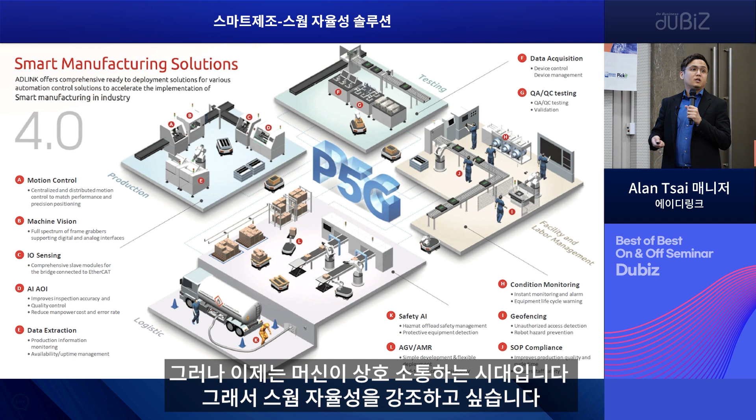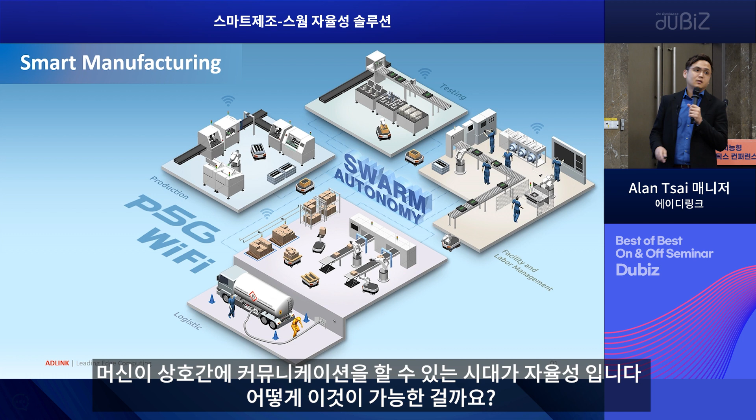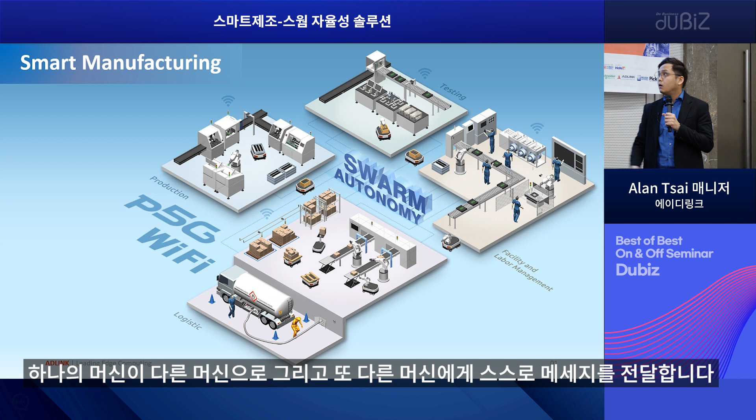But nowadays, try to imagine that the machine can talk to each other. We call this SWARM autonomy — our concept to make the machines talk to each other. How can they do that? In the factory, no matter old or new, the AMR is a physical machine that can go through the factory everywhere. If the message can be carried by the machines themselves, I can bring the message from one machine to another, or maybe a third machine. So here I will say we try to make our factory go from automatic to autonomy.

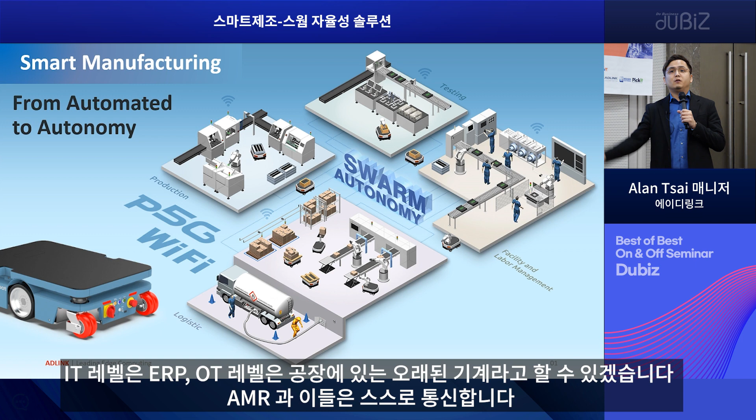The AMR is the physical thing we provide, and the AMR can communicate with the machine, or at the OT level or IT level. IT level is like ERP, OT level is like all the machines in the factory — they can communicate by themselves. This reduces labor and also optimizes production efficiency.

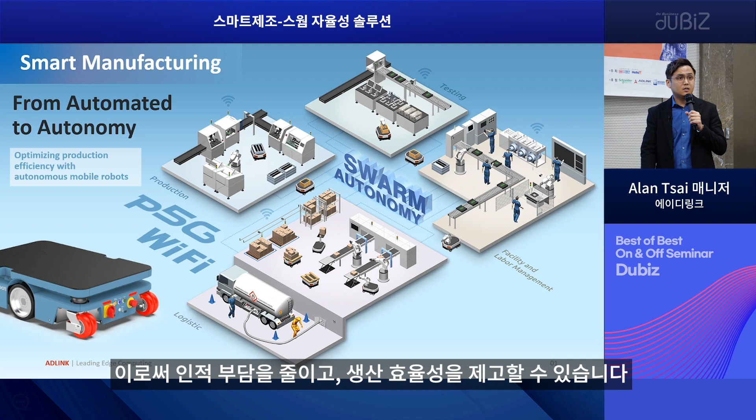With the autonomous mobile robots — this is a very simple concept about autonomy. Next I'll talk about the challenge: if a factory wants to transfer from automated to autonomy, what kind of challenges will they face?

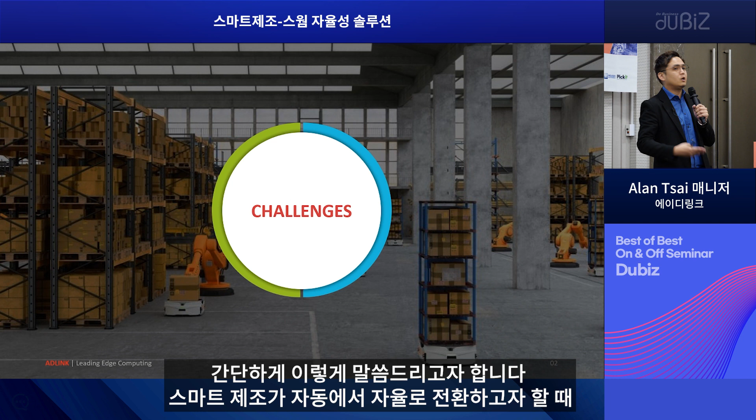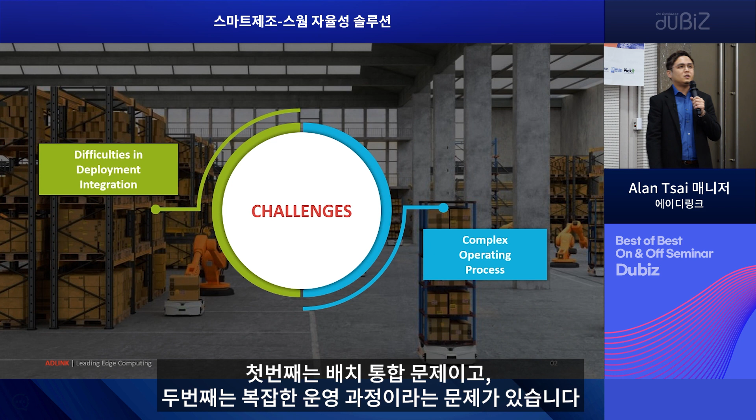Put simply, there are two challenges we sum up: the first is the difficulty in deployment integration, and the other is the complicated operation process. In the factory, whether new or old legacy, there are lots of machines, and they come from multiple brands, each with their own systems. SWARM autonomy needs to combine with the OT level and IT level, so you can imagine — lots of different brands, different systems — it's really hard to integrate or combine with every system.

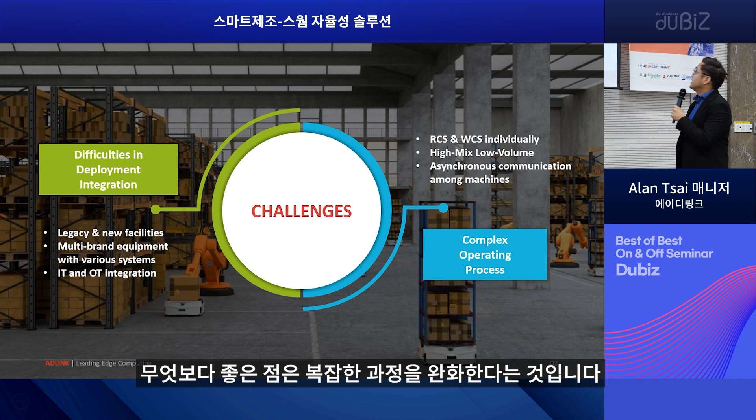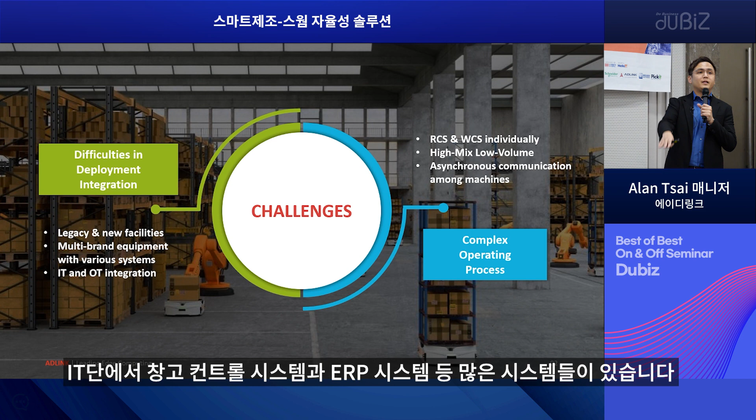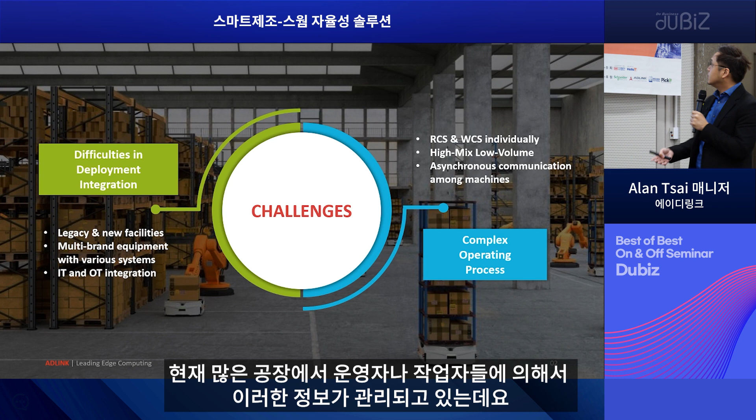Based on this, the operating process is complicated. The old systems — we have lots of AMR brands, and each brand has its own robot control systems. At the IT level, maybe we have warehouse control systems, ERP, lots of systems. Nowadays, lots of factories are all controlled by operators or workers, so the machine information or data synchronization and communication go through this. These two things are the challenges we hear from factory owners trying to transfer their type from automated to autonomous.

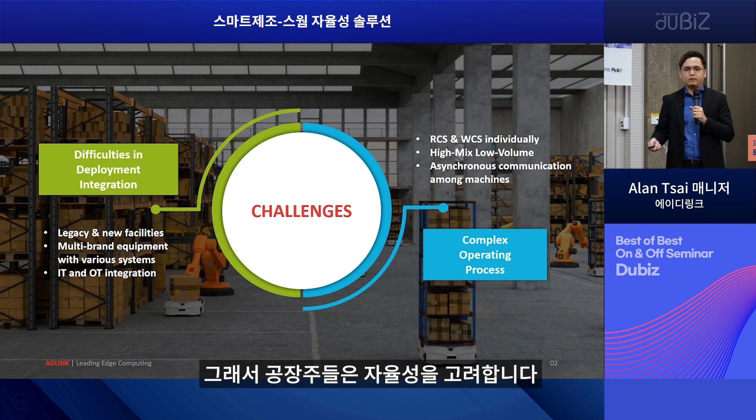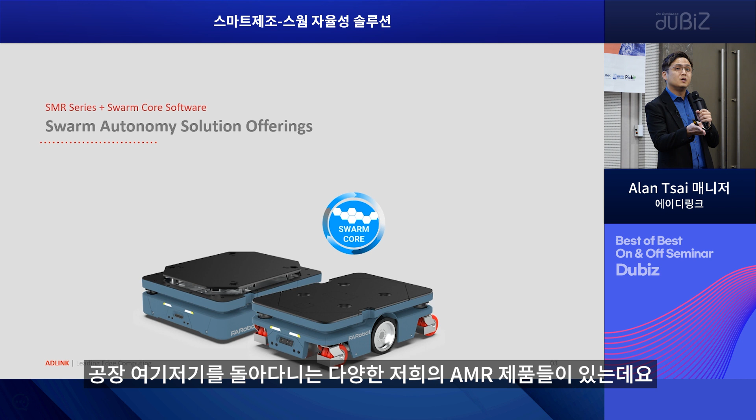So our offering: we offer two kinds of products here. One is the AMR I mentioned, the physical thing that goes to the factory everywhere — we provide the AMR and call it SMR. The S means Swarm, so we named our AMR the SMR. The other is Swarm Core. For the AMR, we provide two kinds of payload: 1000 kilograms and 250 kilograms.

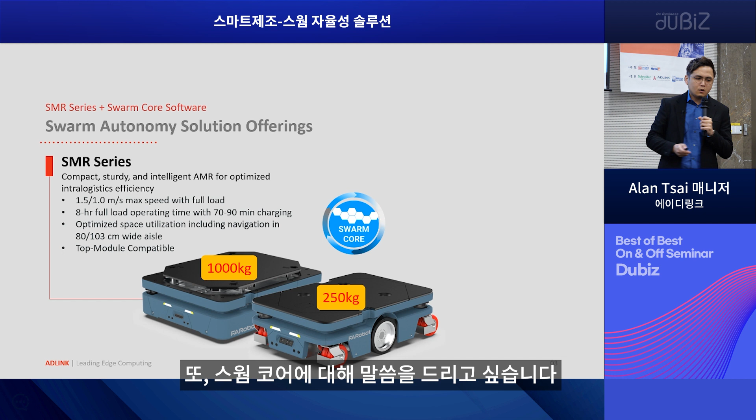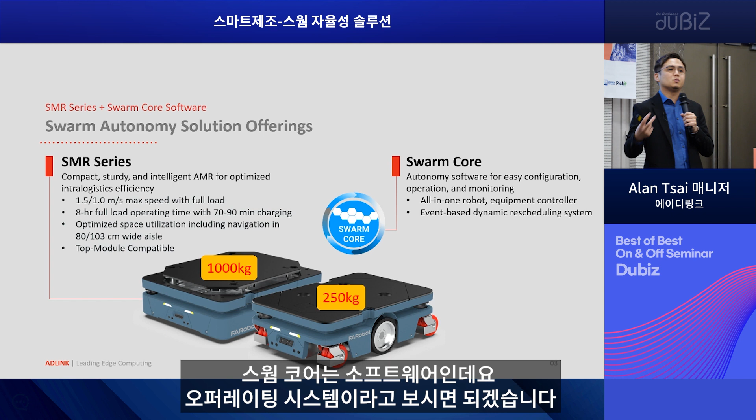It depends on the different scenario — you may have a robot conveyor, or a big rack or small one, so different payloads let you use different SMR models. The other product is Swarm Core, which is just software — you can imagine it like an operating system. We put Swarm Core into the server, like an edge controller, PC, computer, or server — basically any computer. Swarm Core tries to make it easier for the user to configure the machine, operate, and monitor it. Swarm Core has two kinds of features here.

One is going to combine the old machine, another is our dispatching systems. Next I will go through two features about these two products, and I'll try to use the features to give more detail about the autonomy, what we can do.

The AMR has different functions. Maybe one function combines with a conveyor, maybe combined with a robot. So the AMR will take a robot to pick up or drop off things. That's the OT side, normally separated into this product line.

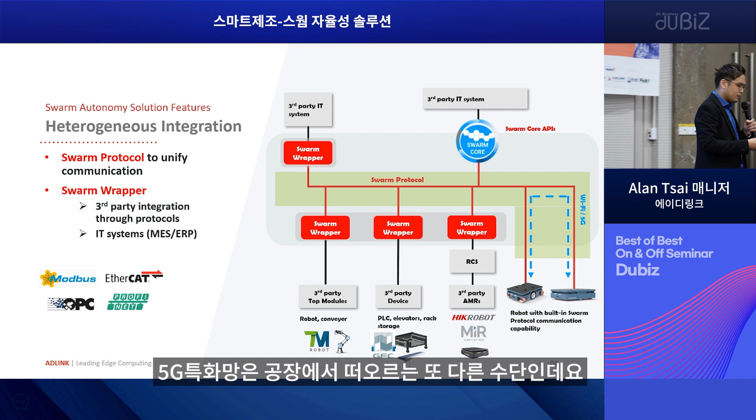By the way, as you know, in the factory we try to make the data connect together, so maybe we use Wi-Fi internet to make each machine connect. Our AMR also provides private 5G - private 5G is another trend for the factory. Our company is going to provide private 5G servers, so our AMR will definitely support the private 5G protocol. So this is one of the Swarm Core features.

Another one, as I just mentioned, our Swarm Core has the dispatching system, which means fleet management. For the dispatch system, we use event-based control. Event-based means the ERP will send mission one, and mission one means maybe the AMR will go from machine A to machine B, or machine B to machine C. So each machine is defined as event-based. We use this kind of event-based control management, and we have our dynamic reschedule capability.

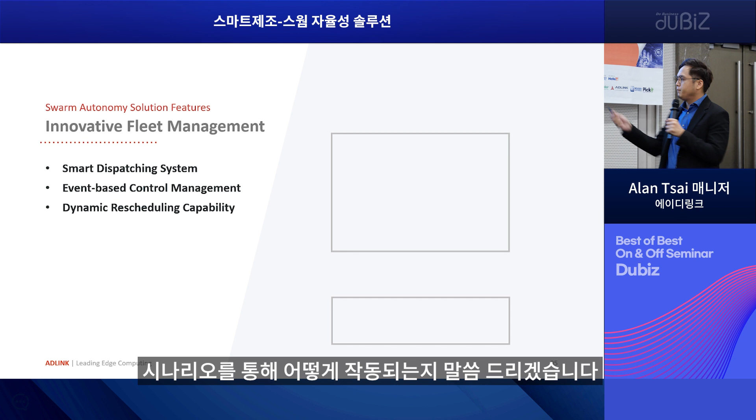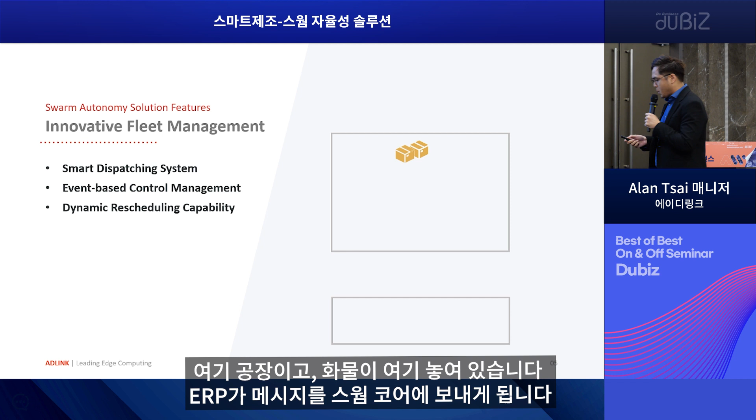So I will give you scenarios on the right-hand side to put it simply how it works. Okay. So the first one here, we can see there's a factory and there's a cargo here. The ERP will send a message to our Swarm Core, and Swarm Core will ask one of the AMRs to pick it up. Okay, so that's very easy.

Another scenario is that there's another cargo here. So actually, it's the same. Our Swarm Core will get the mission from the ERP, and another AMR comes. But if something happened on the road here, maybe some obstacle, it stops the AMR on the way to the cargo.

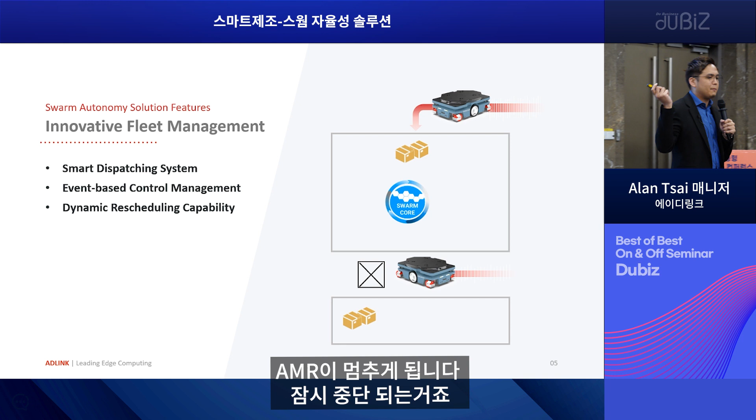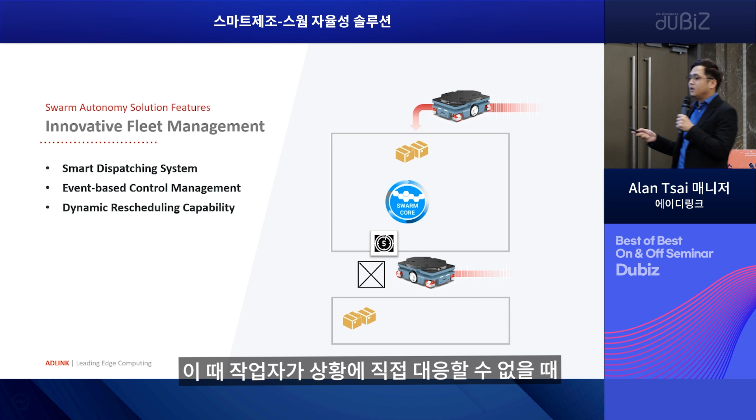We have the timeout. You can set the timeout to 5 seconds, 10 minutes, 30 minutes. So it's counting down, and if the operator cannot handle this kind of situation, the AMR will go another way. We call it our backup route. This AMR will go another way to pick up the cargo to finish the mission. So we call it dynamic reschedule capability.

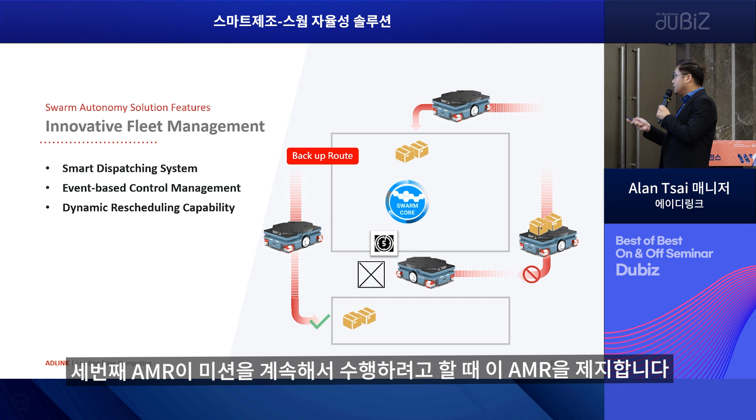Okay. So the third scenario is here. If the situation stays here and a third AMR comes and wants to go this way, our Swarm Core will talk to the third one and say, oh no, we cannot go this way. So it will pick another way. We call this traffic control. So these three scenarios describe our dispatching system.

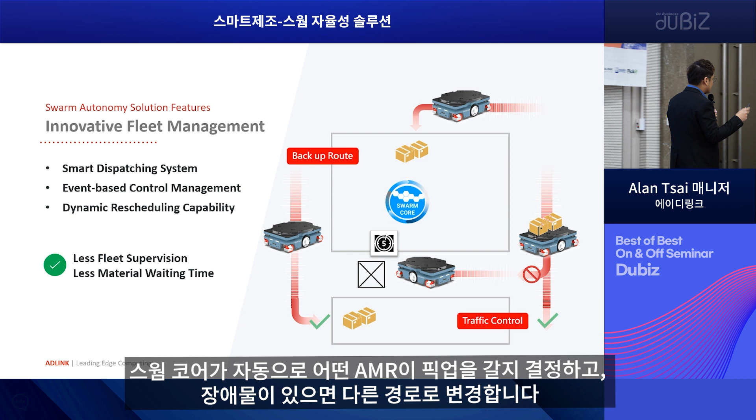We try to make sure the material has no need to wait. Our Swarm Core will automatically decide which AMR goes to pick up and which AMR goes another way to avoid this kind of thing. And as I said, Swarm Core has this kind of supervisor, so we try to let the operator have less fleet supervision. All of this runs automatically in our Swarm Core.

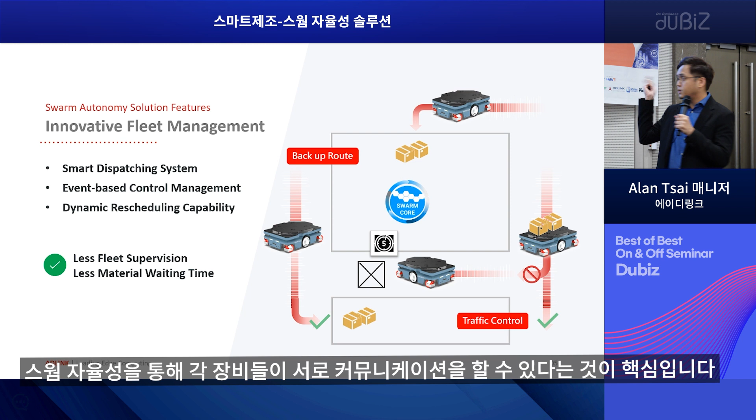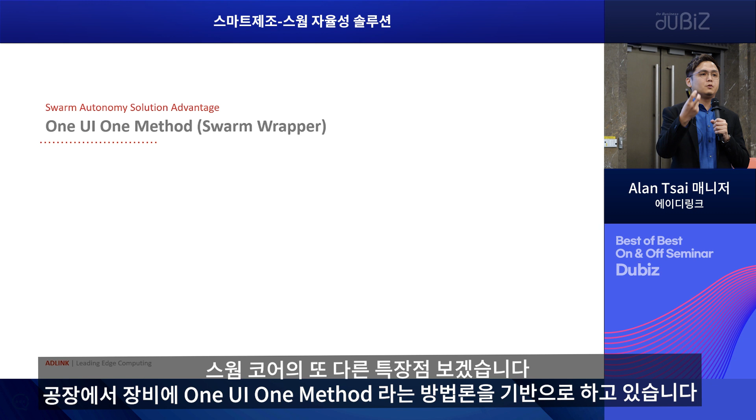So these are two features of Swarm Core, and I think they are very simple to understand. Imagine everything goes to the Swarm autonomy, so every piece of equipment can talk to each other this way. Now I will say another advantage of our Swarm Core, because in the factory, we try to make the device or the UI simple. It's quite good, right? So what does our UI provide?

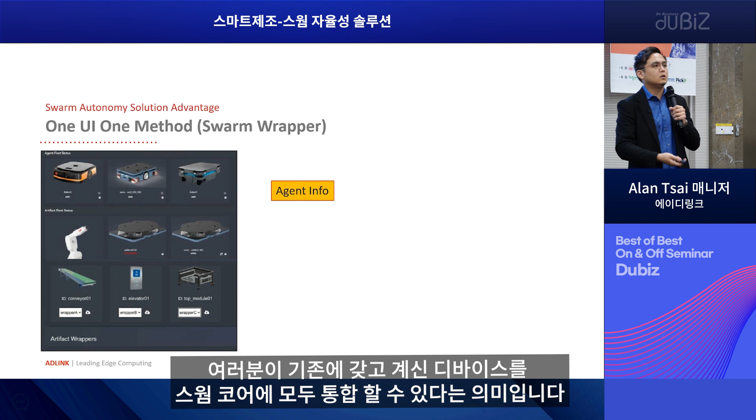The first thing is that our UI provides the agent info. You can see the middle one is our AMR. This is a real case in Taiwan. We integrated a third-party AMR here and another third-party AMR here. So from this UI, you can manage all the devices you have already integrated into Swarm Core. At the top here, we can see there's a conveyor, elevator, top modules.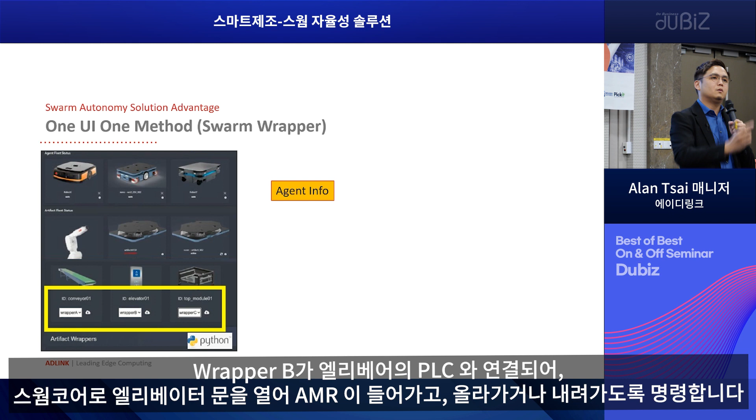These are third-party devices. It's not a robot, it's not a car, right? So for this kind of third party, we use the Swarm wrapper. You can see we have wrapper A, combined with the conveyor, and wrapper B, which is connected with the PLC in the elevator. So Swarm Core can control the PLC, ask the elevator to open the door, the AMR goes through, and then goes down or up. Also the top module as well. So this is agent info.

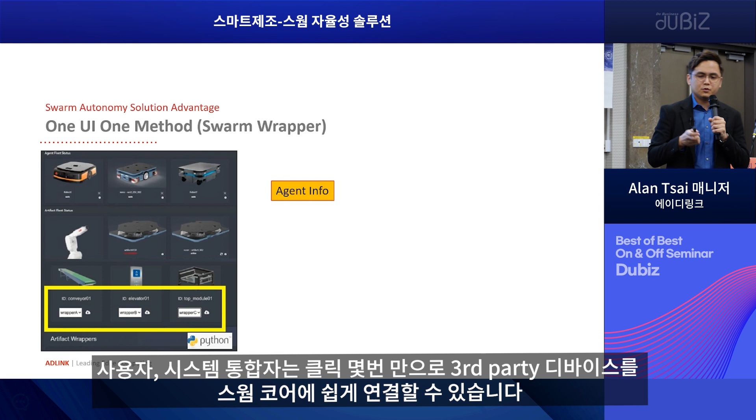Right now our wrappers use Python to modify, but in the next generation we will provide a UI. Only UI, so the user or system integrator just uses a click, making it easier to connect the supplier device into Swarm Core. Okay. So the next one is real-time monitoring.

In this Swarm Core, the UI also provides a real-time monitor to check how the situation is, how things are in the factory, so we can see where each AMR is and what happened. So it's real-time monitoring.

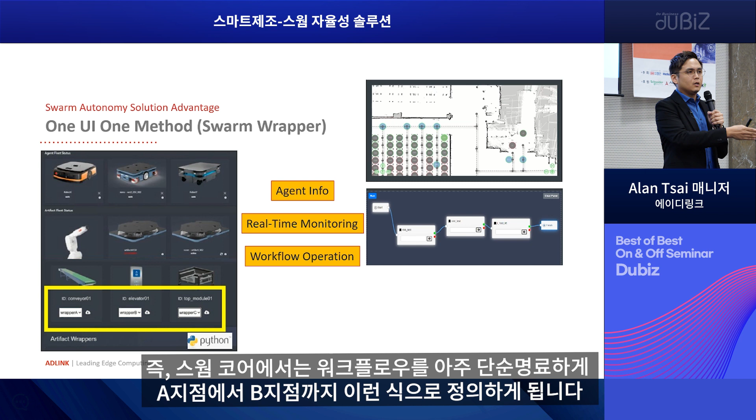And the third one is workflow operation. Just like I said, it's more complicated here. Because with the AMR we don't have a cycle, which means that Swarm Core will automatically decide which AMR will pick up the missions, right? So in the Swarm Core, we need to define the simplest workflow, like point A to point B, okay? So this is one workflow. So we need to define the workflow operation in this UI.

So it's very, very simple. You just put in the command you want to give the AMR, so the Swarm Core will know which AMR needs to use a different workflow. Okay.

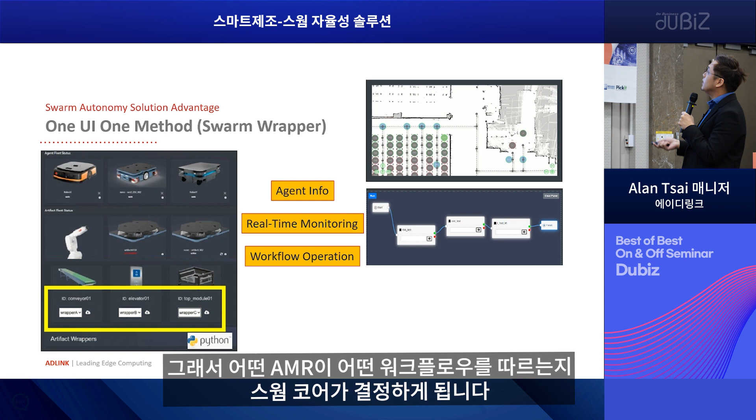And the last one is the status management. So in the factory, we will show how the AMR works now, and everything will have the data here, so users can easily see what they want to see, the status management here. Okay, so we try to put everything into one software, our Swarm Core, and try to make it easier for users to connect, no matter whether it's third party or our solutions. Okay, so this is all Swarm Core.

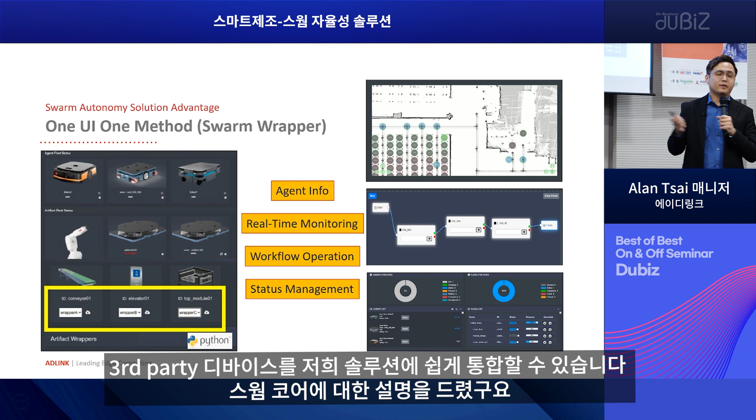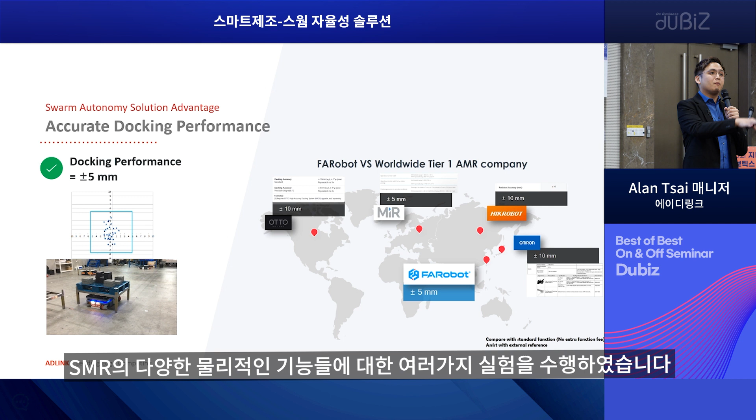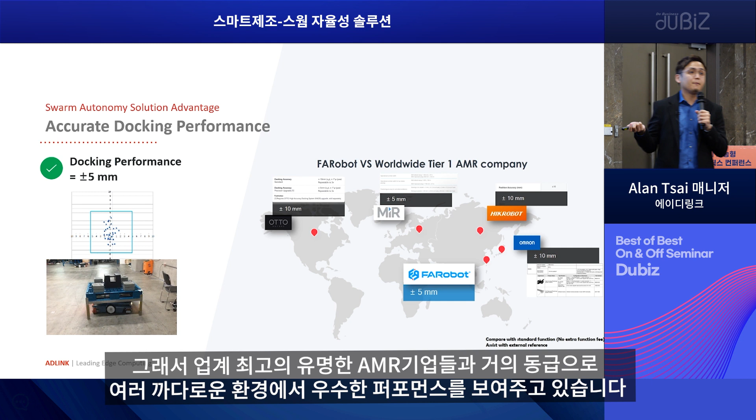The next is about the AMR, the physical things. So this page is easy to understand. About the physical AMR, we have our experiment. Our docking accuracy right now is plus and minus 5 millimeters. So compared to tier 1, another brand company, I think it's nearly the same performance. So you can use the AMR in maybe more critical environments.

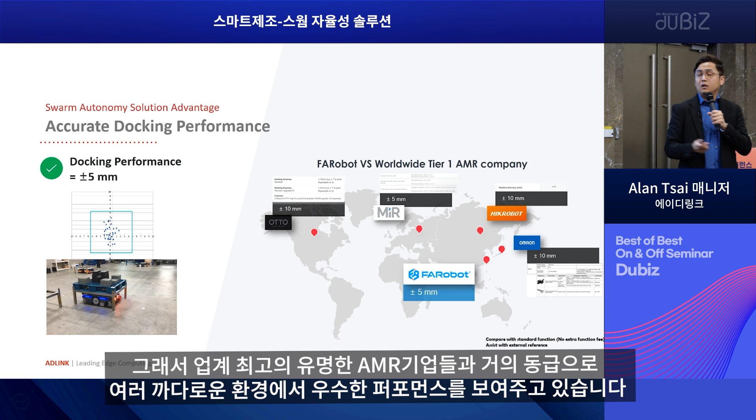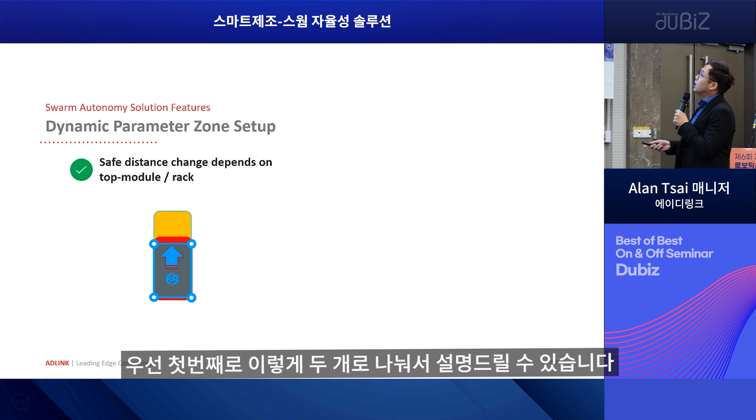Okay. Another is the dynamic parameter zone setup. This is related to safety. When the AMR goes to the factory, it's about safety. So I will explain two. One is here. You can see the circle, the blue circle with the blue line. This is our AMR. Just imagine this AMR is our car.

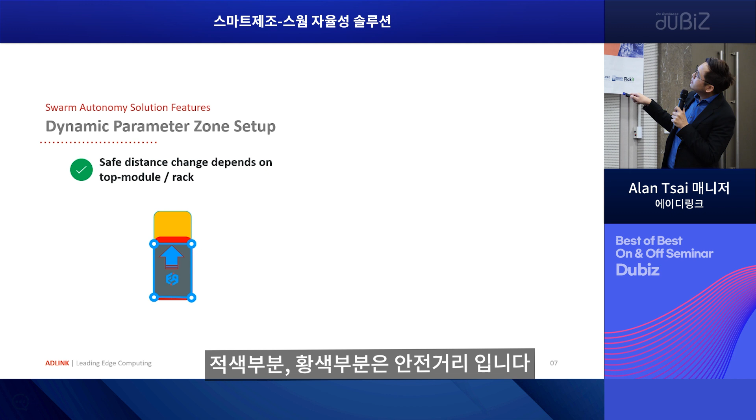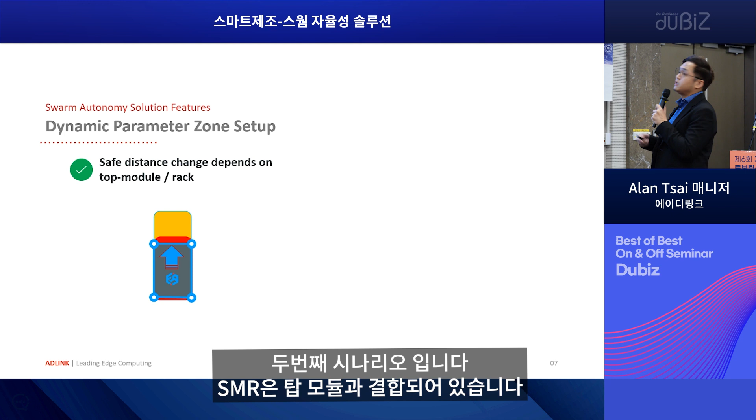And the red one and the yellow one are the safety distance, which means that if the AMR goes through and something in front of it comes into the yellow area, it will slow down, and into the red one, it will stop. So it's quite understandable. I think each AMR has this kind of function, right? But we have two scenarios. Just as I mentioned, our AMR can combine with the top module, right?

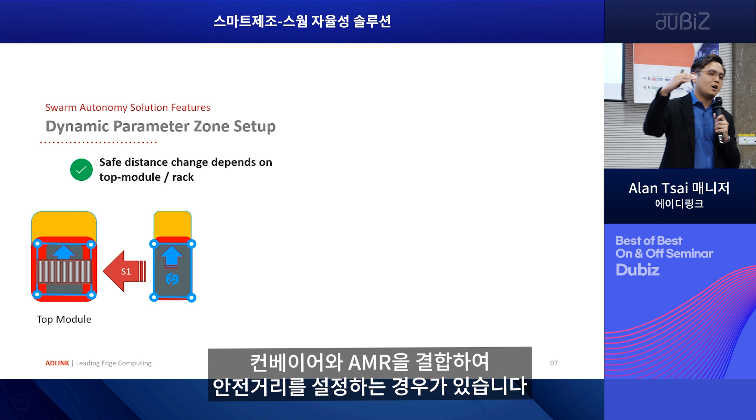So scenario one is here. This is a conveyor, right? The top module conveyor. I use a conveyor as an example. So you can see the conveyor is bigger than our AMR. So I combine the conveyor with our AMR, and we need to set up the safety distance change, so the AMR knows how far the safety distance needs to be.

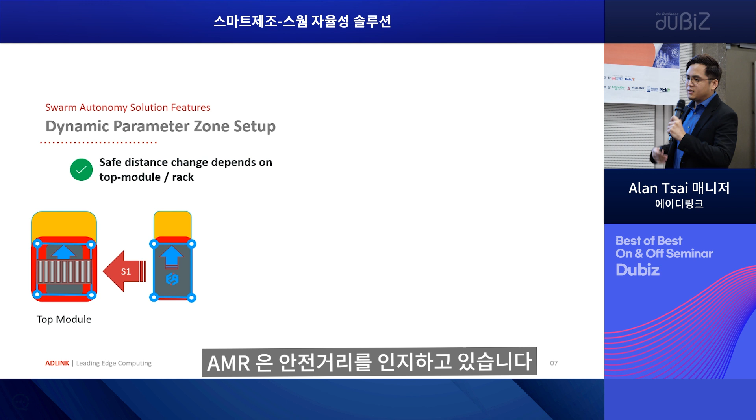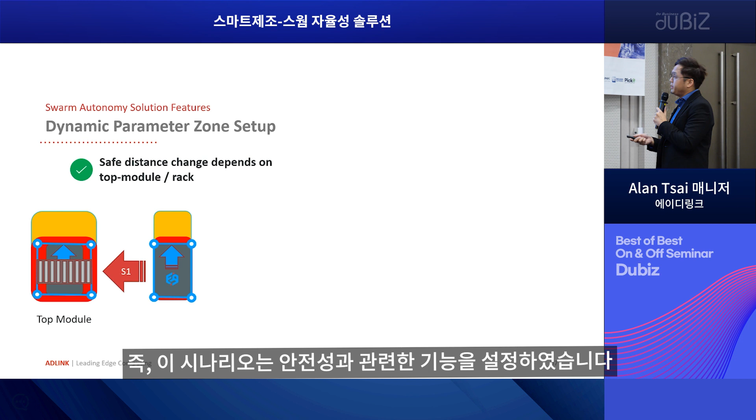So if it goes to the factory, it needs to know, oh, I can go this way. This is quite small, I need to go another way. Okay, so this is the top module here, trying to make it more safe. Another scenario, 2, is about the rack.

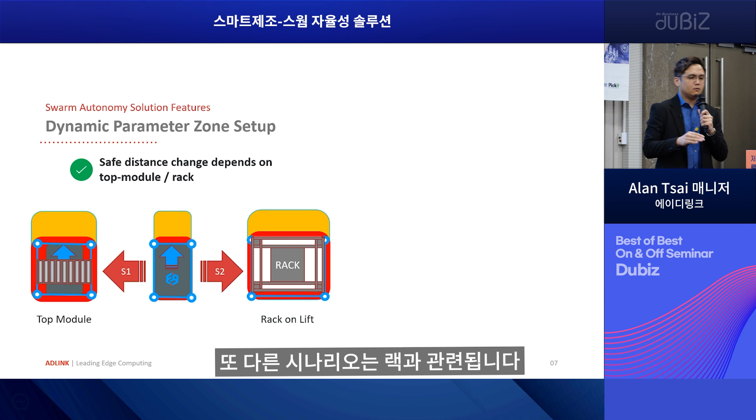I say AMR in factory. Okay, sorry. AMR in a factory has two different kinds of usage, right? One is combined with the top module, another is combined with the rack. Racks are everywhere in the factory. So our AMR can lift one rack, move it to another place and put it down, and it goes to pick up another rack.

So as you know, racks have different sizes in a factory. So we can set our rack size in Swarm Core, and just as I mentioned, our AMR is automatically assigned by Swarm Core. So AMR 1 maybe goes to rack 1, and it will dynamically change the safety zone, okay, to make sure the safety zone is changed. And if it goes to a small one like rack 2, it will be smaller. So this is the safety zone change depending on the top module or rack, okay.

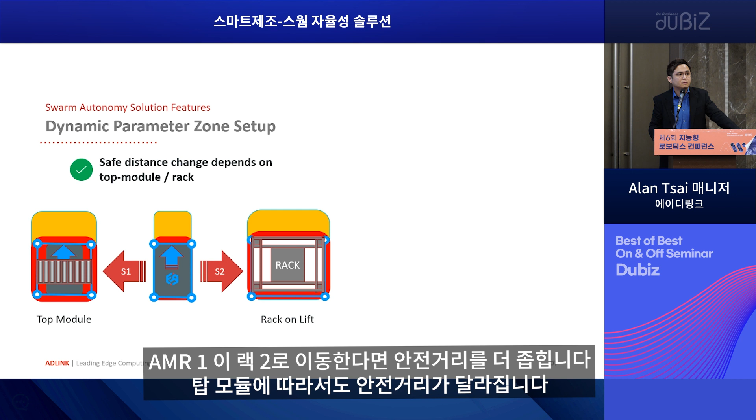So the next one is the max speed setting in different areas. This is a real case in Taiwan, right? So you can see in area 1, the machines are not close to each other. And compared to area 2, the machine is the blue circle, each machine is quite close, right?

So we can set up area 1 and define it as the small one, which means that no matter which AMR goes into area 1, they will use the max speed like 1.5. But if we go to area 2, we can set a bigger one, and any AMR that goes here just uses 0.6 as the limit. They will have a restriction of AMR speed, to make the AMR safer in the factory. So these two things are very important in our AMR, which means that we want our AMR to be safer in the factory.

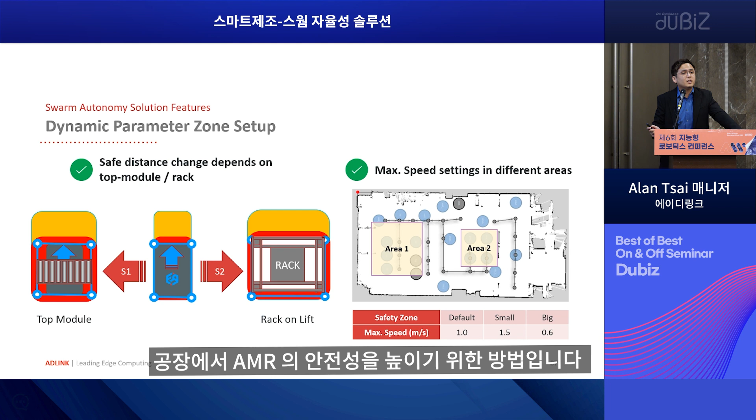All right. So what are the benefits of our Swarm autonomy solution? As I just mentioned, Swarm Core is a kind of software, and we provide the Swarm wrapper SDK or Swarm API to let third-party devices, no matter OT or IT side, integrate easily. Just use one method for better development.

And the second is high flexibility. As I said, the environment in a factory is more complicated, right? So no matter which factory you face, the AMR has its own safety setup for dynamic change, and also the Swarm Core dispatching system handles whatever may be happening in the room. We believe in going from automatic to autonomy, so we try to make the machines talk to each other. You can reduce the labor time.

All right. So this is a case in our factory. I just want to say we built it in 1 week for the demo because Swarm Core is quite easy. It's simple: we combine the robot, the AMR and the machine. So it took just 1 week to finish this scenario.

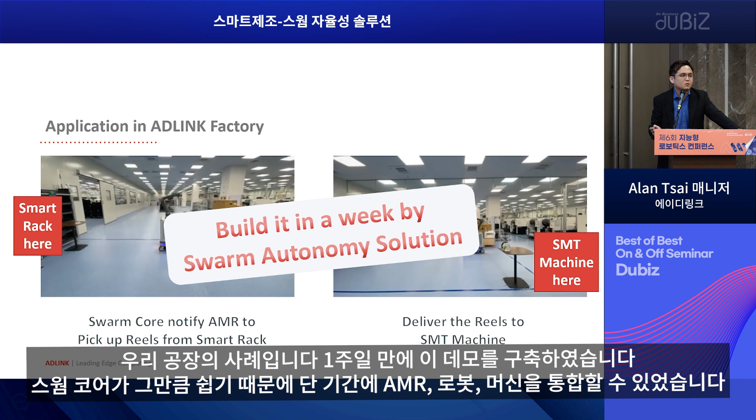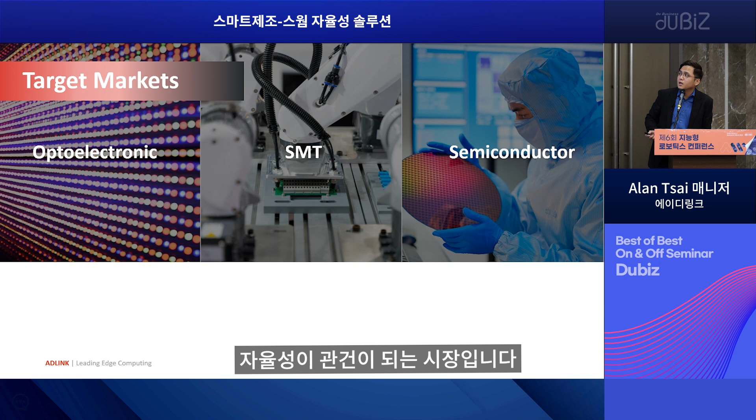Normally I would say a target market, but I put three: optoelectronic, SMT, semiconductor. I think this is the target market for autonomy. Right now we have three kinds of AMR with top modules, and it's a project ongoing. So you can see for different industries, our AMR can combine with different top modules, depending on the system integrator's know-how.

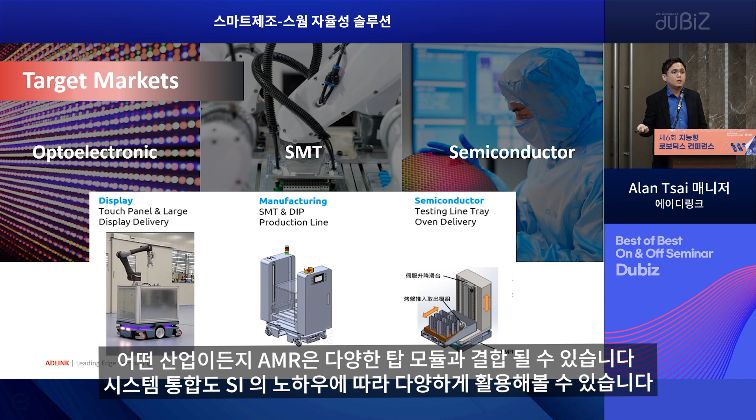Now to give a very simple competitive analysis. Here there's brand M and brand H, with AMR and AGV. In the past they used QR codes or guidelines on the floor, but our AMR uses SLAM technology, so there's no need to put anything on the floor. And the accuracy with the marker, as I mentioned, is plus and minus 5 millimeters.

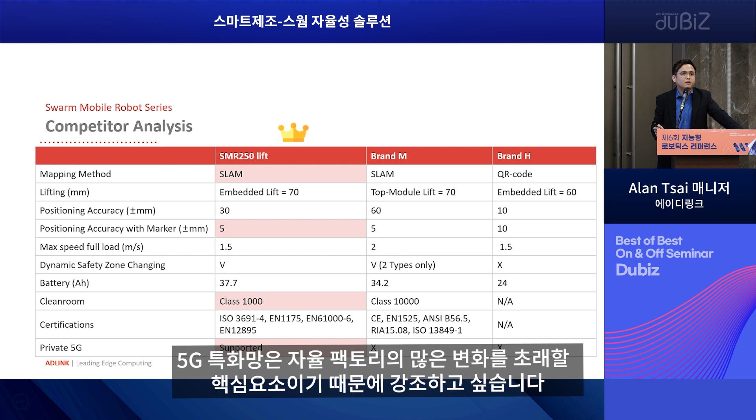Another thing is the cleanroom. We just got the class 1000 level last week, so this is the latest cleanroom level in our AMR. And I want to say that our AMR has private 5G. Private 5G is another trend in autonomous manufacturing, so private 5G support I think is most important as well.

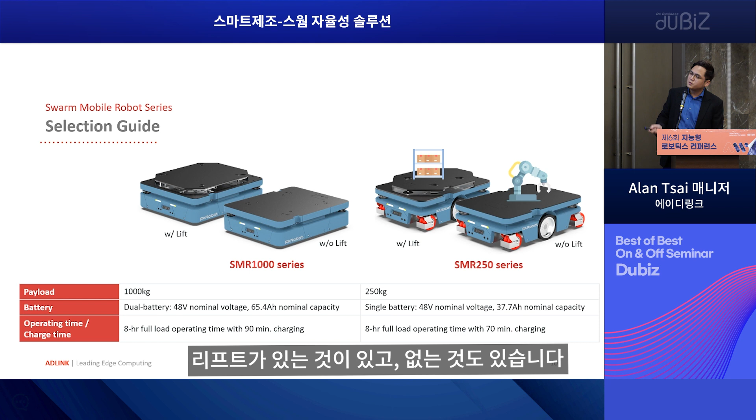All right. So to sum up what we provide: we provide two payloads, 250 kilogram and 1,000 kilogram payload. With a lift, it's normally used with a rack. Without lift, normally with a robot or conveyor.

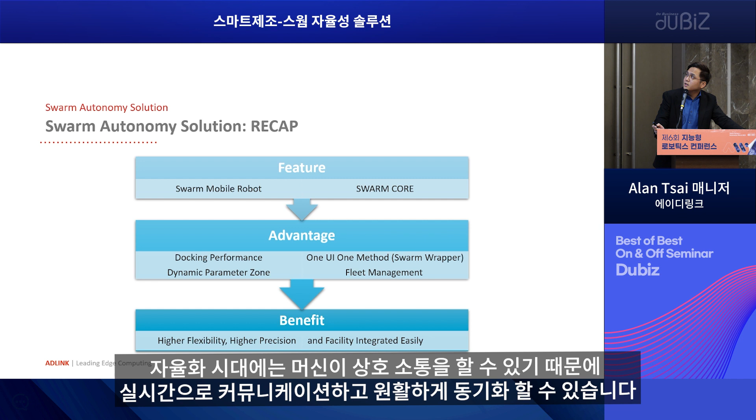Let me recap what we talked about: automatic to autonomy. Automated machines are quite easy, everyone is doing that. But with autonomy, we try to make our machines talk to each other to reduce communication time, so information flows in time and synchronously. So we provide the features here, Swarm robot and Swarm Core. Swarm Core is one UI, one method, to make it easier for our users to transform from automated to autonomy.

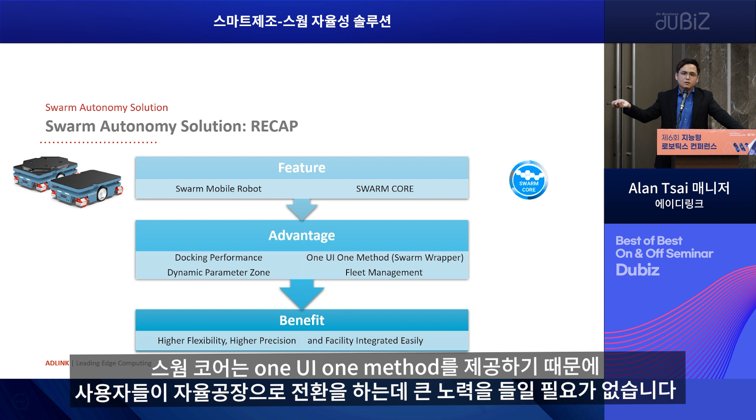And besides Swarm Core, we also have the docking performance and the parameter zone setup. We don't only provide the software, we need to provide the AMR as well. Because combining these two, we have a more powerful performance for this solution. So the benefits are high flexibility, high precision, and facility integration.